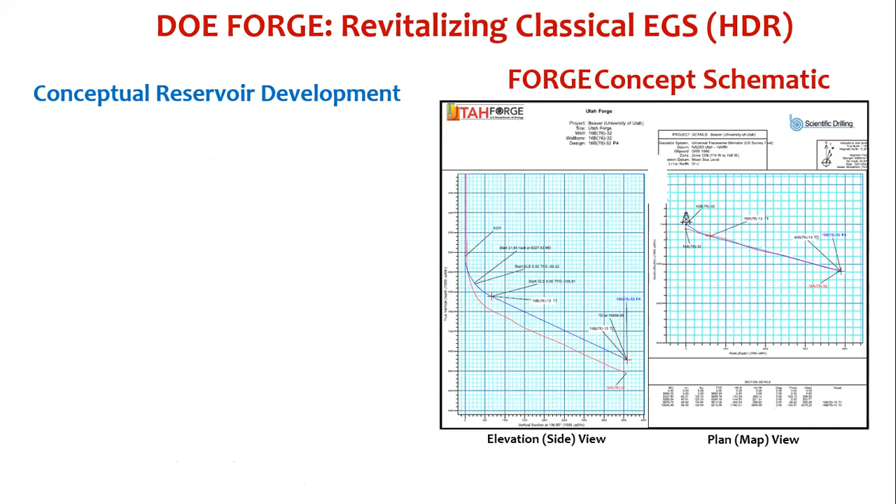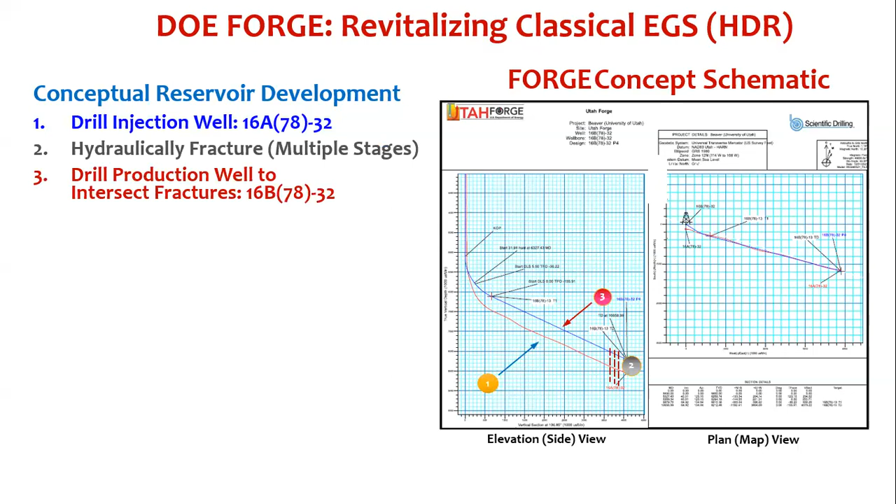As you recall, we drilled 16A 7832. Last April, we did 3 hydraulic fractures in 16A. This year we just completed drilling 16B 7832, intersecting to the best of our ability the microseismic cloud from those 3 stages. In a commercial situation, we would populate the rest of the well. Our future plans will be to create these hydraulic fractures along 16A and also eventually do some work on 16B.

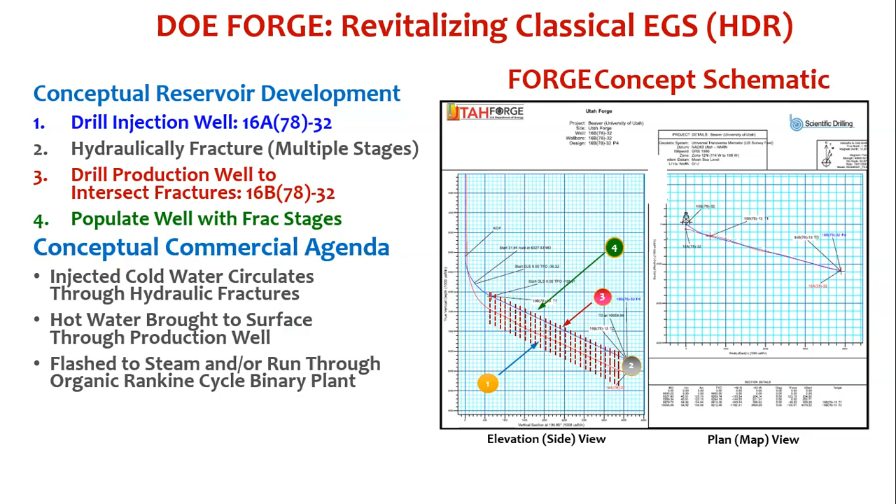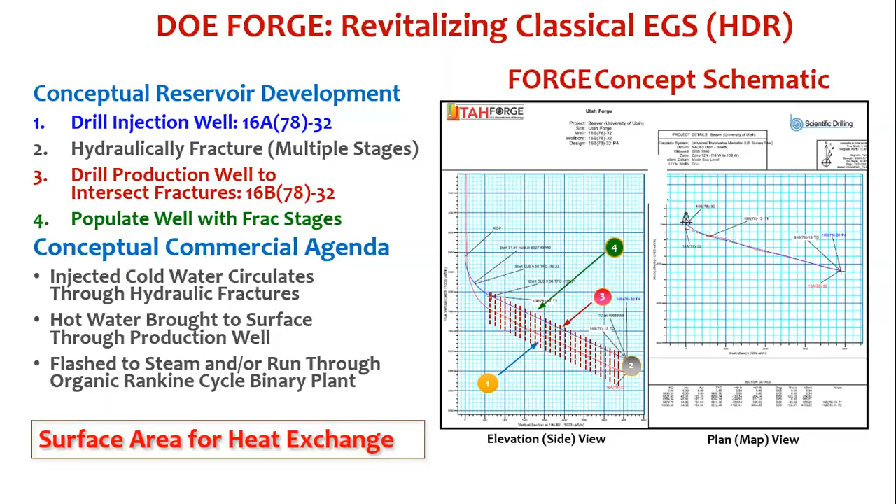As we were drilling 16B, a well drilled 300 feet vertically above well 16A with the same trajectory, temperature was again a challenge.

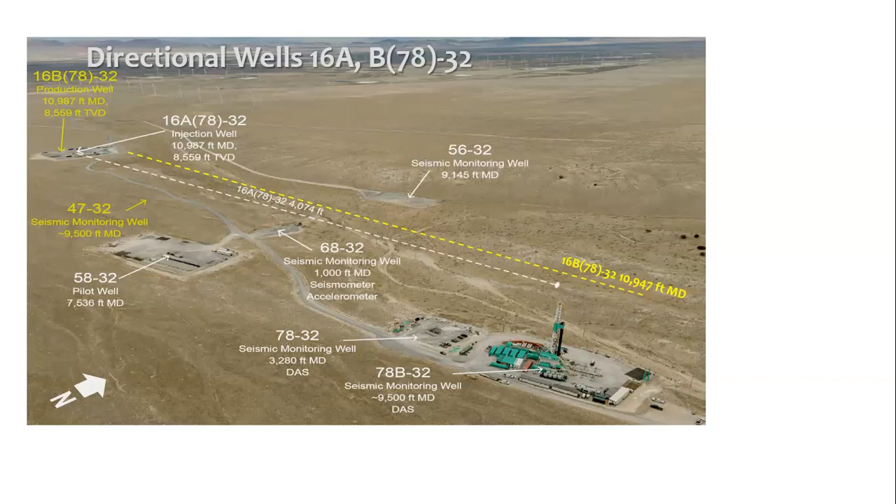This is a bit of a travelogue describing what was encountered in these wells. As you recall, temperature is the dominant challenge, a conductive thermal regime with static bottom hole temperature somewhere in the neighborhood of 450 degrees Fahrenheit at the depths we're talking about.

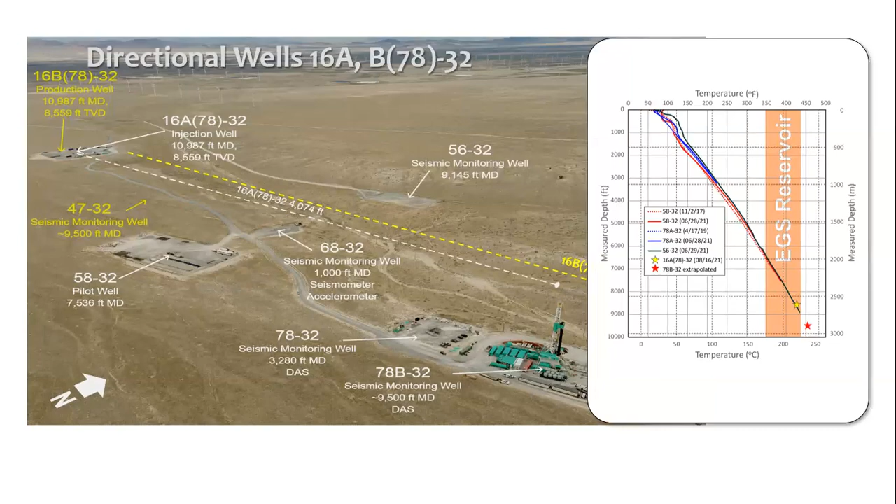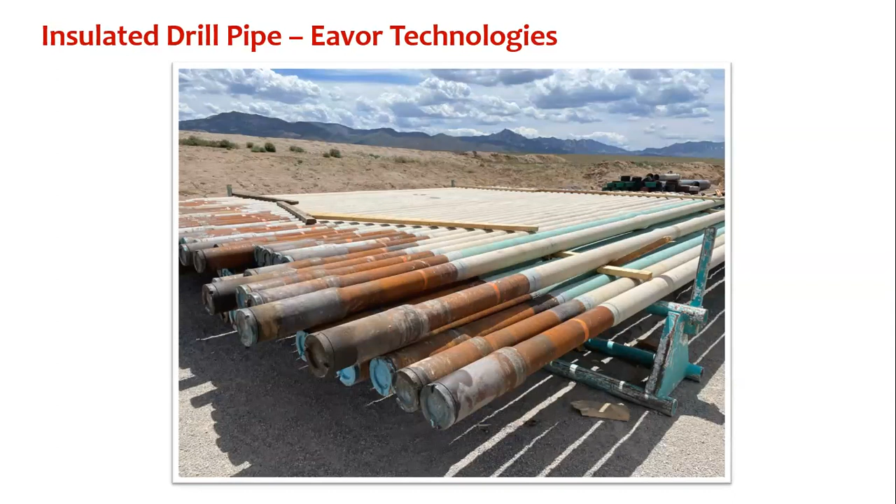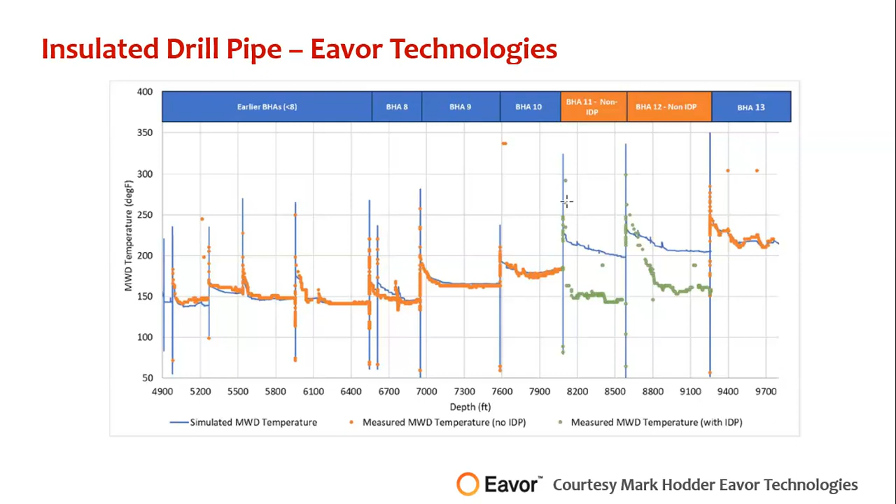It's undecided whether the reduction in temperature assisted the rate of penetration, but unquestionably this will assist in running tools that are temperature sensitive. I think it qualifies as a significant success, something that bears future evaluation. The DOE earns significant credit for facilitating this particular test.

Now, temperature is always an issue. The second challenge in these reservoirs, not so much a challenge, is the lithology - we have to appreciate what sort of lithology and naturally fractured regime we're dealing with.

As we know, we're dealing with a high strength, high modulus, abrasive granitoid to gneiss. Through these operations, we spent a lot of effort coring to recover core for the R&D programs and for characterizing rock mass properties and fracture properties.

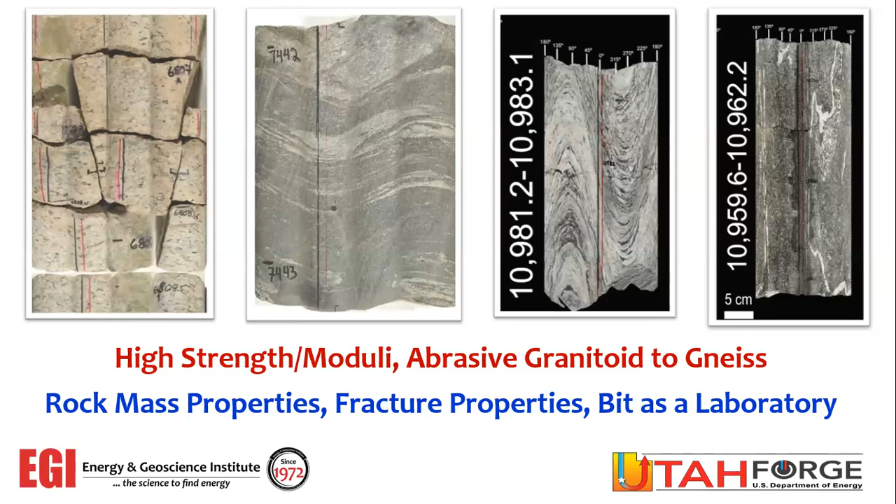At Forge, we have a substantial interest in understanding the bit as a laboratory, taking measured properties at the bit and back-analyzing those properties to come up with mechanical properties along the entire length of the well. So a lot of coring, a lot of effort in terms of reservoir characterization to determine fractures.

Many of you have seen me show this slide before, but I think it's so important.

At the right is what we often see in an unconventional setting, where we see relatively planar fractures. What you're seeing are microseismic networks from multiple stages. If you look at the top part of the right-hand panel, you can see these are relatively planar.

The question still remains, are these planar in a setting such as at the left, which is an outcrop of the Forge Reservoir, where despite exhumation and exfoliation, there's indication that in situ there are multiple fracture patterns.

These fracture patterns we've been able to monitor particularly well. Schlumberger has been a great partner in terms of doing this. And to overcome the temperature, we've done a couple of things.

First of all, what you can see on the left are FMI tracks, static and dynamic FMI tracks, and static and dynamic UBI tracks. These have been particularly illustrative in terms of determining fractures and also in terms of determining the profile of the well.

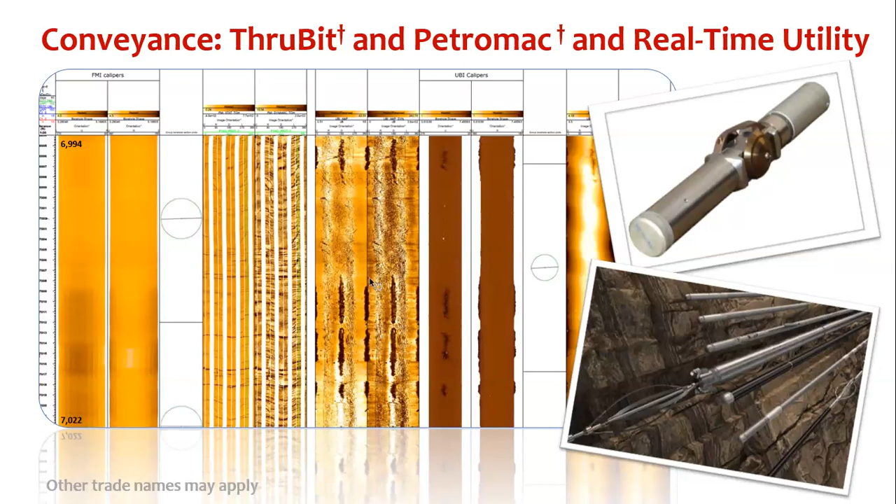And so substantial and excellent logging information has been derived. We've also, as I said, done a significant amount of coring.

The picture at the top is from core 1, I believe—the first core that we took, and I'll show you that in the next slide. There was a lot of exploration in terms of improving coring performance.

And ultimately we worked significantly with Canamera Coring, and they guided us on the optimization of the weight on the bit to optimize and maximize the length of coring possible for each core run.

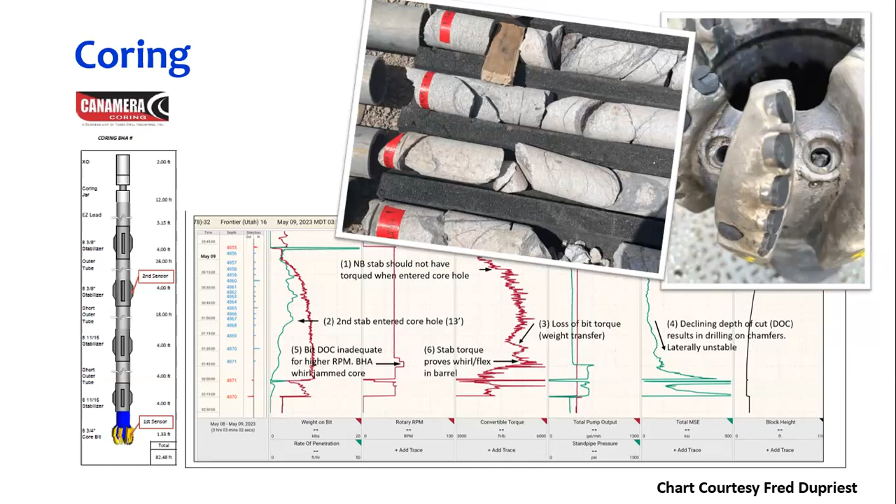In terms of that, we selected 4 zones for coring. As you can see, a shallow vertical zone—picked shallow so we could sample some lithologies we hadn't cored before, and start to debug the coring process, because it's a hard, difficult rock to core.

Subsequently, we picked 3 zones where we felt the microseismic cloud from the 3 fracs in the 16A well would intersect the projected trajectory of the well we are drilling.

We bracketed 60-foot zones and cored within them. Stage 3 somewhere in the 9,800-foot domain, stage 2 somewhere in the 10,250 to 10,300 foot domain, and then stage 1, the first frac in 16A, at 10,430 to about 10,490.

So as you can see, 176 feet of core captured, about 154 feet of that was recovered, and that's out of a total of 9 runs, so 270 feet of barrels that had been run.

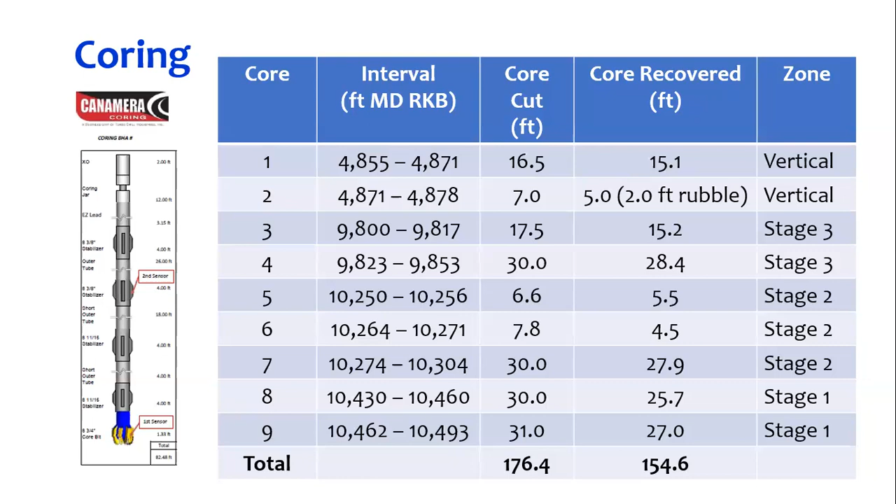Really an extremely successful coring campaign, and I encourage people—right now Clay Jones and colleagues are evaluating these cores. There'll be more to come on mapping of the cores, fractures, mechanical properties testing, and possible determination of whether we detected tracers on these cores. So a lot going on with the core analysis—stay tuned for that.

Of course, we're always interested in drilling technology, and we had a great partnership with the bit companies in particular.

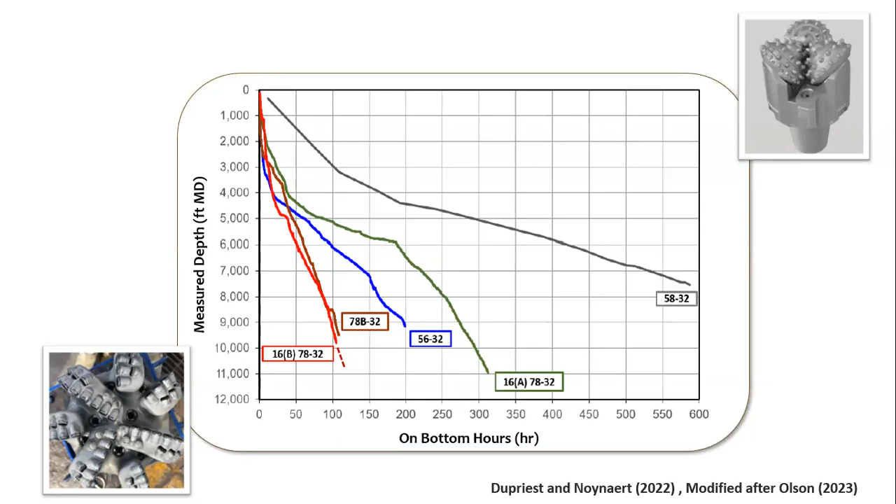drill 500 feet with a particular bit or a particular assembly, and then pull that assembly, even if it was green. And all of the bits, particularly the 8 3/4 inch bits and the 9.5 inch bits, were monitored with sensors, either in the bit or in the center line. And almost all assemblies also had sensors for measuring three-dimensional 3D vibrations in the BHA.

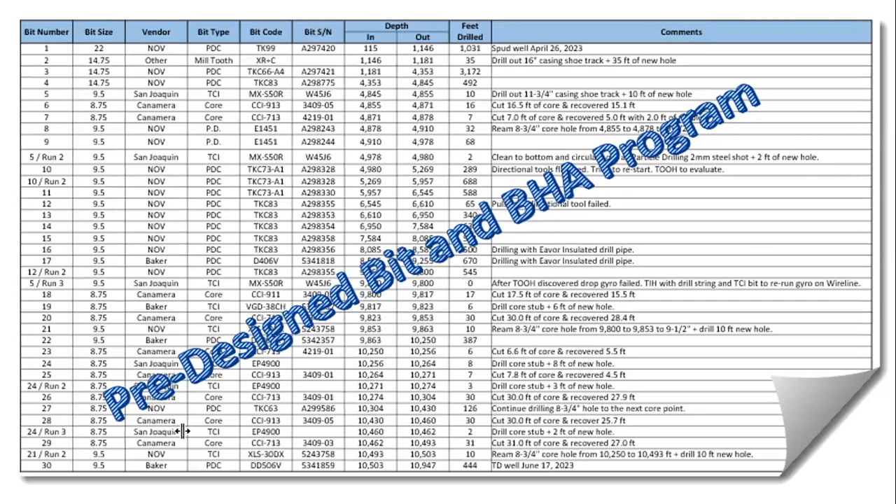So there's a lot of analysis that's going on there. And this is a particularly interesting topic because vibrations were a significant issue at, and always have been a significant issue in these drilling activities. And one of the things that we also tried on this well was rotary steerables.

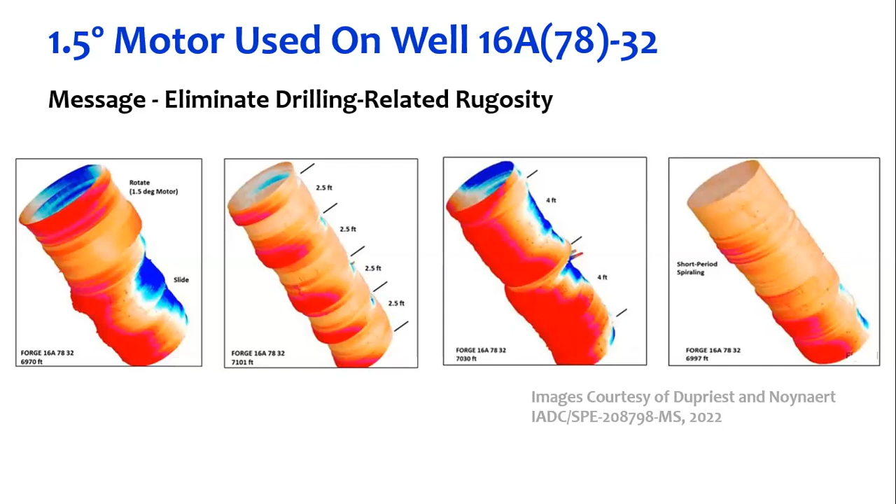And so what you can see is that going from rotating to sliding and vice versa, there are significant ledges. There's significant spiraling in this. And one of the goals here was to eliminate this rugosity, as we'll borrow a term and call it rugosity. And we tried to get around that by using rotary steerable technology.

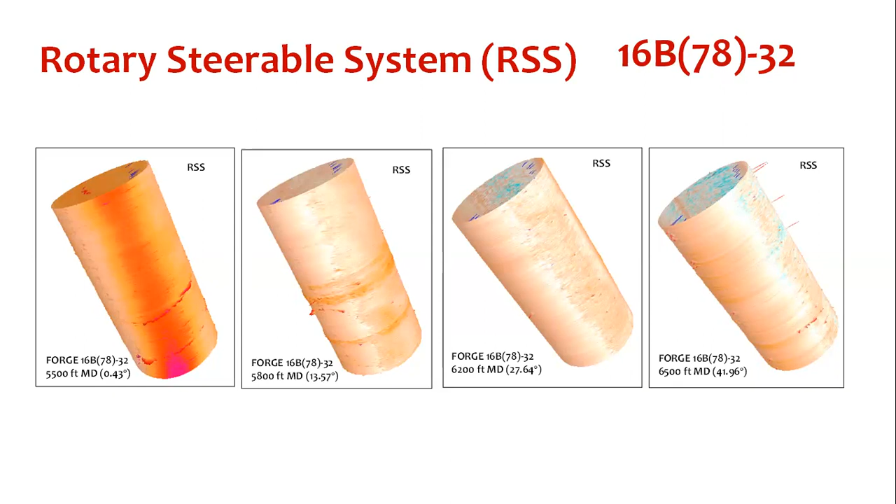Now, the rotary steerable certainly helped, but it did have its own issues, particularly in terms of vibrations and stabilization and temperature tolerance. And so, never a perfect world, and we'll work ahead towards this.

To help with the stabilization, we used roller reamers, and you can see roller reamers at the top here. So what you've got is a full diameter device with roller inserts with nubs on it that help to avoid stick slip, and they worked extremely well.

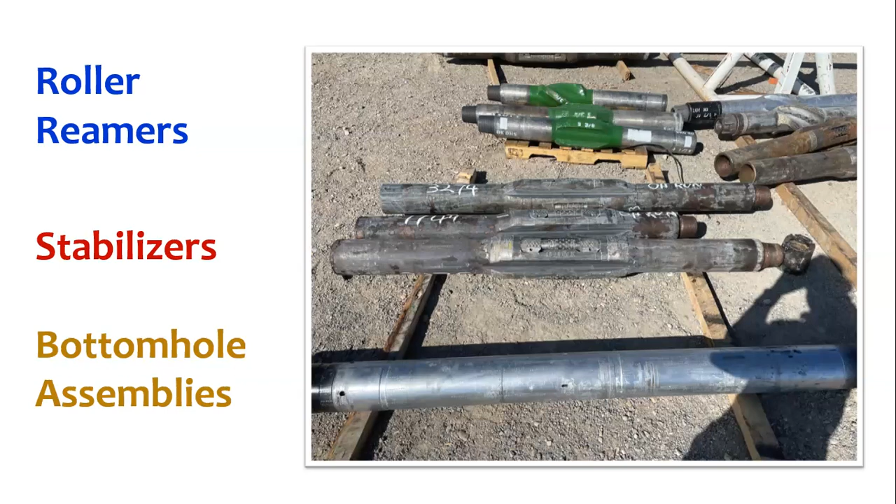We had some other HFTO suppression devices on location, but HF, high frequency torsional oscillations, did not turn out to be a significant problem on this well, but they could be in the future, and we're still interested in evaluating this. And we appreciate the vendors that provided the tools, even though we didn't necessarily use them.

One of the things that turned out that was problematic with the rotary steerable was the degree of vibrations.

We tried to minimize stick slip by running roller reamers, but placement of roller reamers and stabilizers turned out to be a problem, and led to vibrations that were in some cases very significant. It's something we need to address in future drilling.

For example, if we look at this plot, let's look at some vibrations. Here are some measured downhole lateral vibrations, and here are some axial vibrations. You say, well, what's the big deal? Well, the big deal is that this scale is 20 G, that's 20 times the acceleration of gravity. We're having vibrations somewhere in the neighborhood of 10 to 15 G, and that's extremely damaging when you think of force, mass times acceleration, and what that can do to a tool.

So even though we had straight hole, there's work yet to be done in terms of optimizing the bottom hole assembly and the spacing of stabilizers and various devices. But nevertheless, I'm optimistic that this technology worked extremely well. There were complications. You can see a stabilizer at the left that has been worn down significantly, and a roller reamer. This was from a rotary steerable device run with a motor, and the vibrations there were very excessive, and you can see significant damage on this one. Once the motor was taken off, the RPMs were less, and naturally the damage was less. So after this first run, we took the motor off, and there were improvements, as well as some changes made in stabilizer positions. So there's a real possibility for designing these things in advance and improving performance.

The other thing we tried out, and this is the ultimate purpose of these forge wells, is evaluating technologies. We had a very collaborative relationship with Reed Hycalog and Particle Drilling Technologies to test out some of their particle drilling methodologies. One reason this is particularly attractive is from the characteristics of the bit shown on the right. The principle is to inject steel shot in the drilling fluid that cuts out a central hole, the shot goes through the nozzles, it erodes the rock, and then the cutters on the gauge create a very nice smooth hole.

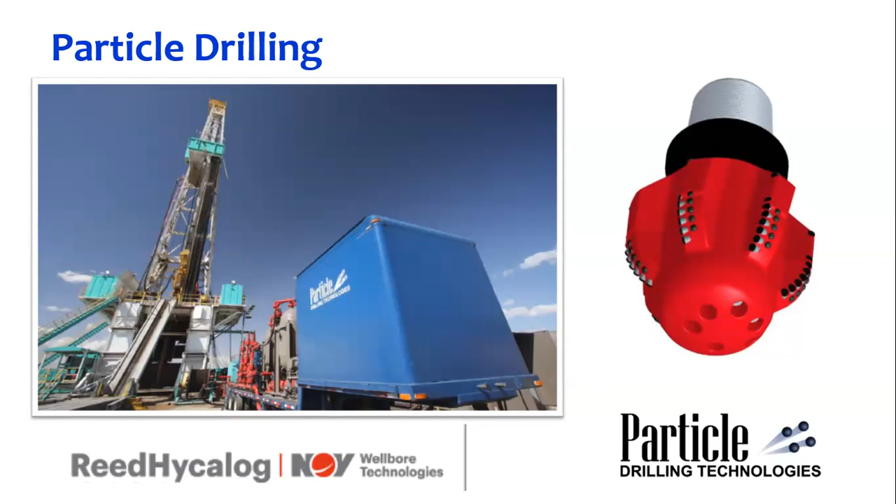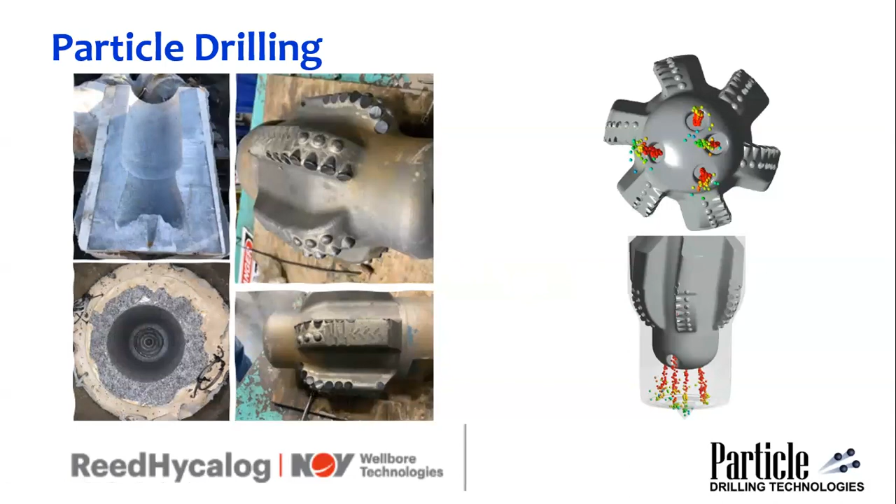Just to illustrate this, you can see an animation of the particle jetting on the right, and on the left, from a laboratory demonstration that was cut open later, you can see the jetting action that occurred and the erosive action. You can also see the very good quality hole that was created. There are some issues in terms of bit design and ruggedness that Particle Drilling and NOV are working on to overcome, and we'll hear more about this in the future.

One of the other successes, drilling was quite successful. We also ran 3 fiber optic strings, and a great deal of thanks goes out to the participants under the DOE R&D programs: one program between University of Texas at Austin and Shell, and another program between Rice University and Silixa. So the 3 fibers were, one was a Baker Hughes

pressure temperature gauge, run just past the heel, and then the UT Shell team ran other fibers right to the toe, to the shoe of the 7-inch casing. You can see at the right the Shell cabling, and I'm calling it Shell cabling in quotes, but Shell was intimately involved.

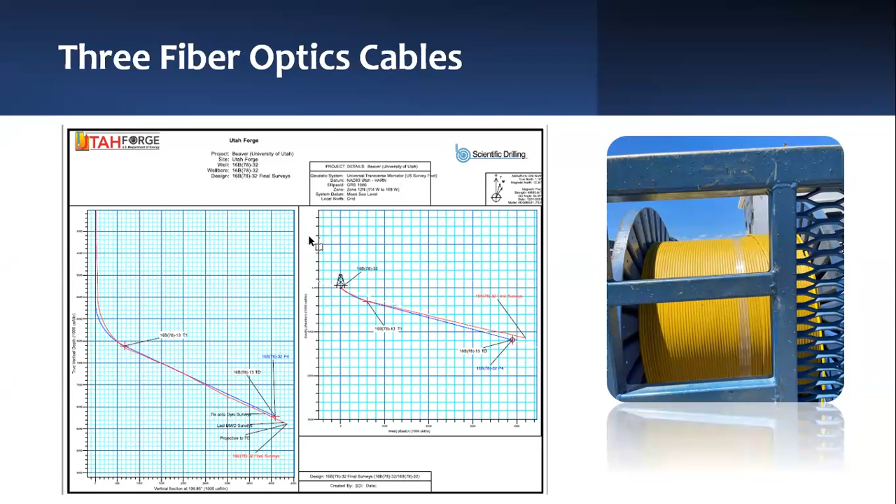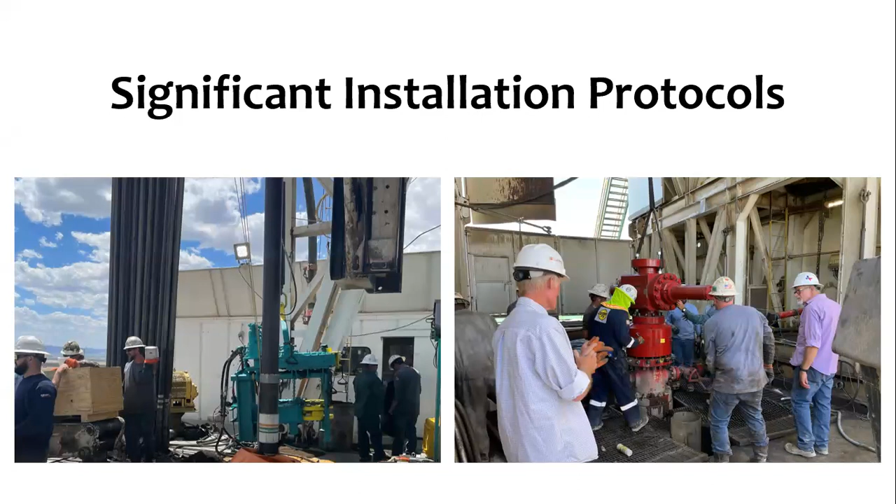A couple of close-ups of what's going on here: you can see some of the strapping of protectors on the left-hand side, and putting a master valve on the wellhead on the right-hand side after the cables had all been successfully run. So we do have some preliminary results here.

I'm going to show some work that's been provided, some analysis provided to us by Neubrex Energy Services, and we're very grateful to them for their efforts, showing some of the work that was run while the cement was being circulated.

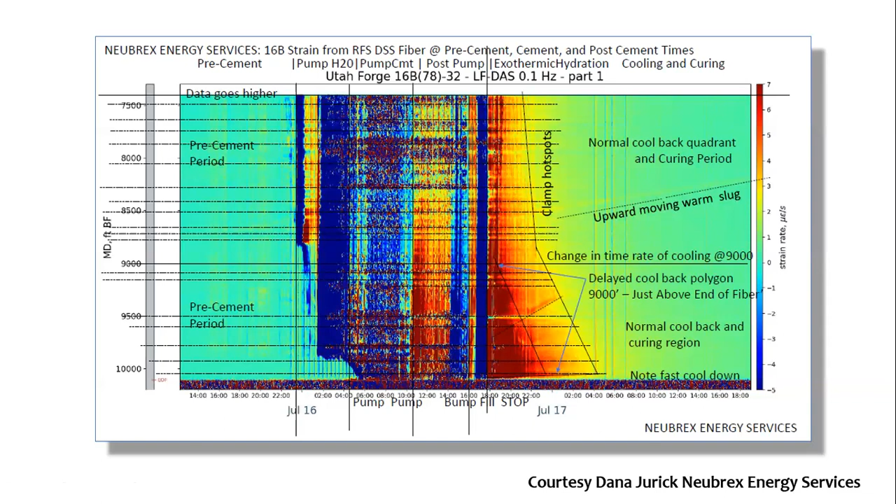It's all very preliminary in terms of analysis and determination, but you're seeing a rate of change of strain - blue becoming more compressive, negative becoming more compressive, and positive becoming more tensile. A lot of this rate change is a function of cool down, exothermic effects at the other end, and ultimately cool back. So a lot going on yet.

Outstanding data has been acquired so far by Neubrex and by Silixa. Now, so we've got these 2 wells in place, and our ultimate goal is to connect the wells.

So I'm going to go back and walk down memory lane for a second here and talk about the fracturing that was done at the toe of 16A, so that we can appreciate the circulation testing that was carried out to determine how much interconnection there was between the wells. So let's recall.

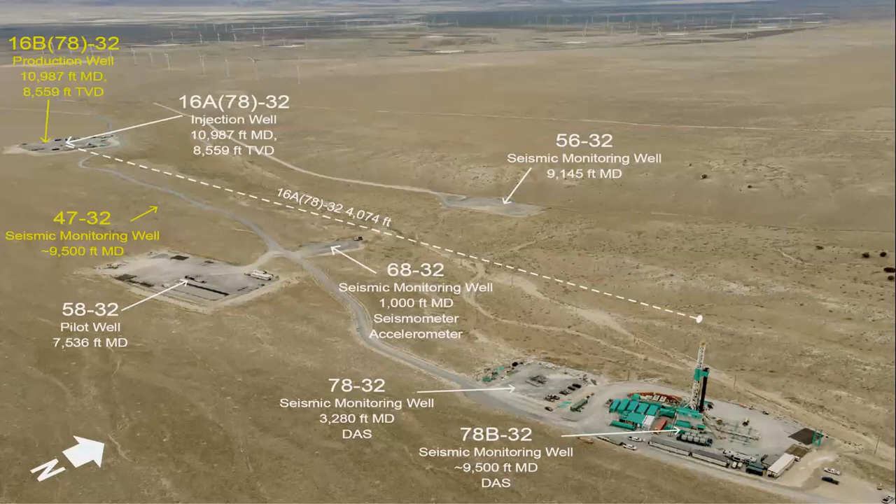Early April 2022, all there was a 16A well, and it had not been fractured. Later in that month, we carried out 3 fracturing stages on that well. During those fracturing stages, we had geophones in 3 wells, and we also had equipment in 78.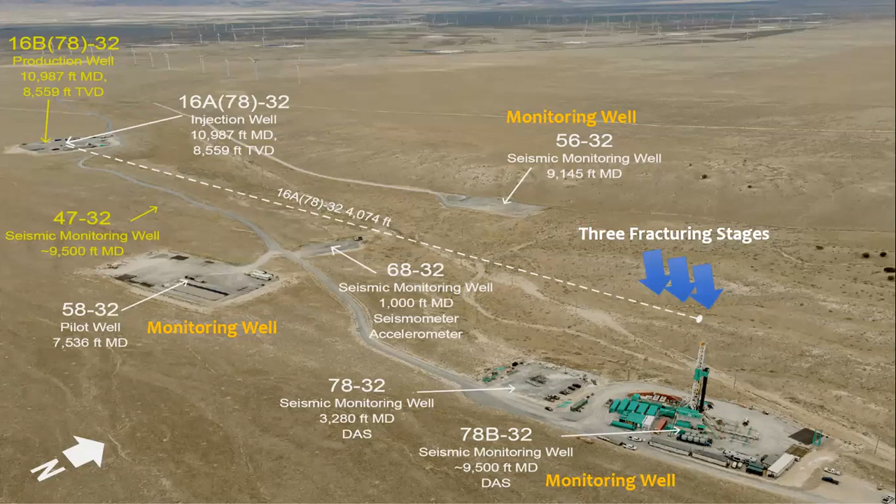We also had some fiber optics in 78, and we carried out 3 fracture stimulations in 16A.

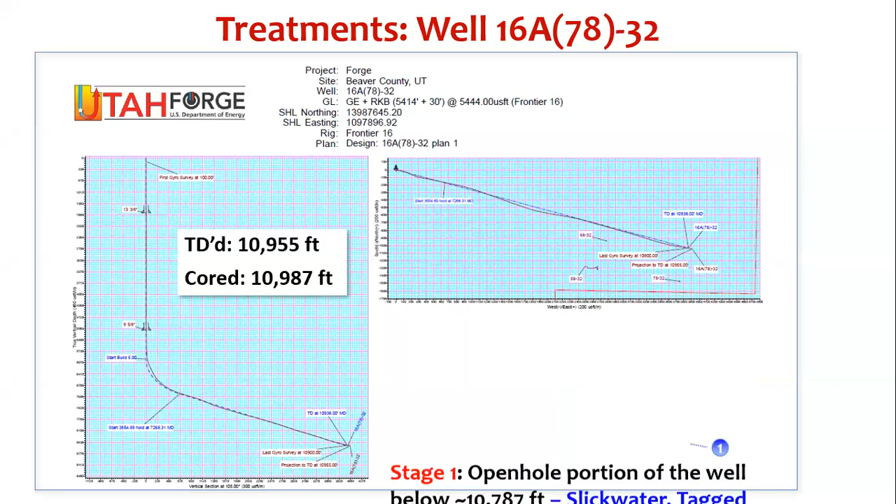So this is the profile of the 16A well. The first was in the 200-foot open hole, slick water, tagged with a naphthalene disulfonate - I'd have to look up specifically which one - but in each of the 3 stages that were pumped, it was a different species of tag.

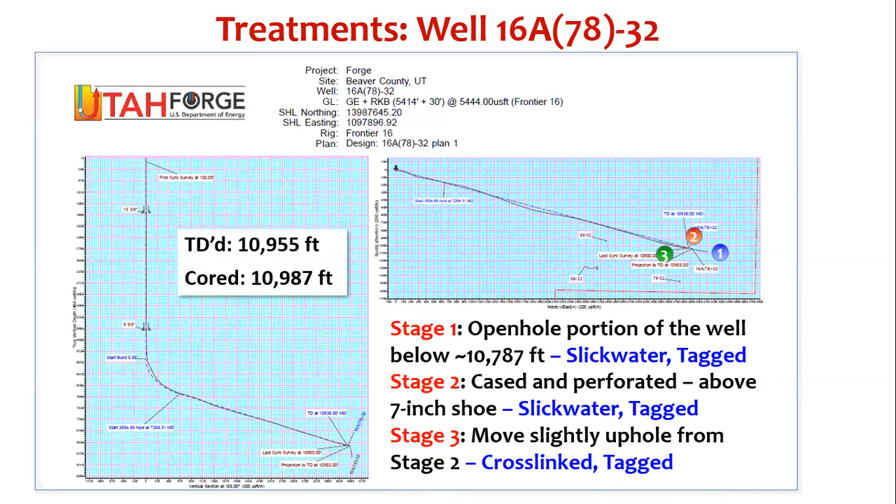The second, we moved up the hole, in a cased and perforated zone, we pumped slick water, tagged fracture. The third stage, we moved up the hole a little further and pumped a cross-linked carboxymethyl hydroxypropyl guar, once again with a tag.

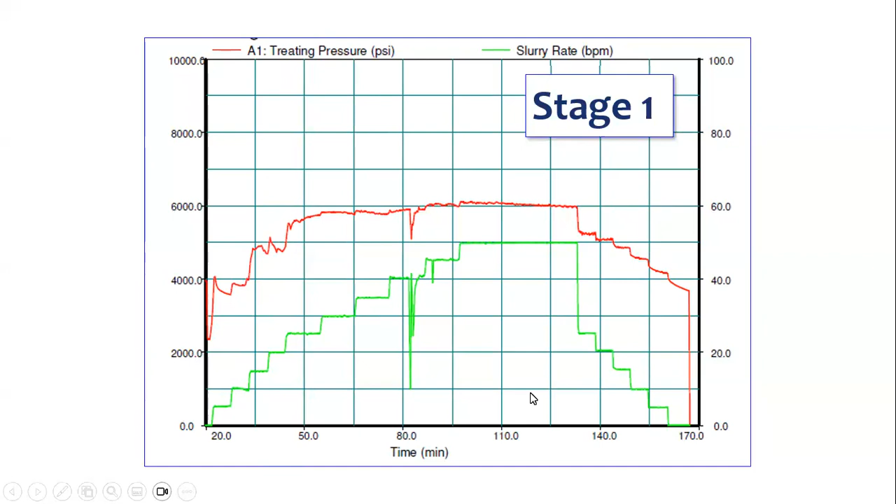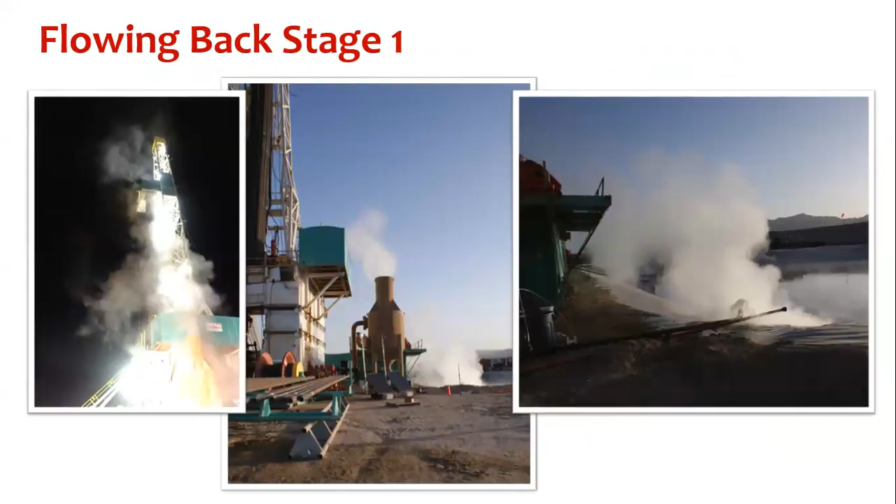We flowed that well back for a substantial period of time. Surface temperature of about 222 degrees Fahrenheit. Subsequently, after 16 hours of flow back, we ran into the hole with a bridge plug.

Historically, we've had significant difficulty in coming up with isolation technologies such as bridge plugs. In fact, a frac plug would be desirable - a frac plug that could be run on wireline, even more desirable. But those were not commercially available or viable at the time.

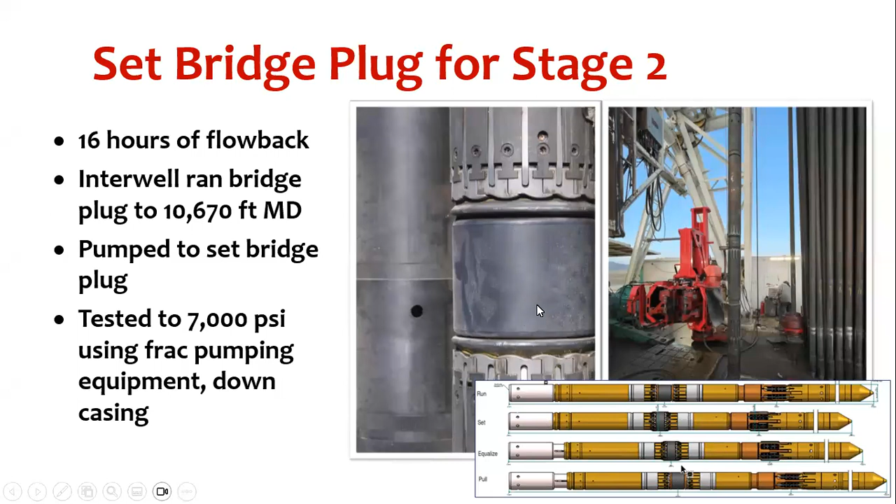You can see the elastomer that provided the seal. So we ran the bridge plug in the hole, set the bridge plug, and tested the bridge plug to a differential pressure of 7,000 PSI.

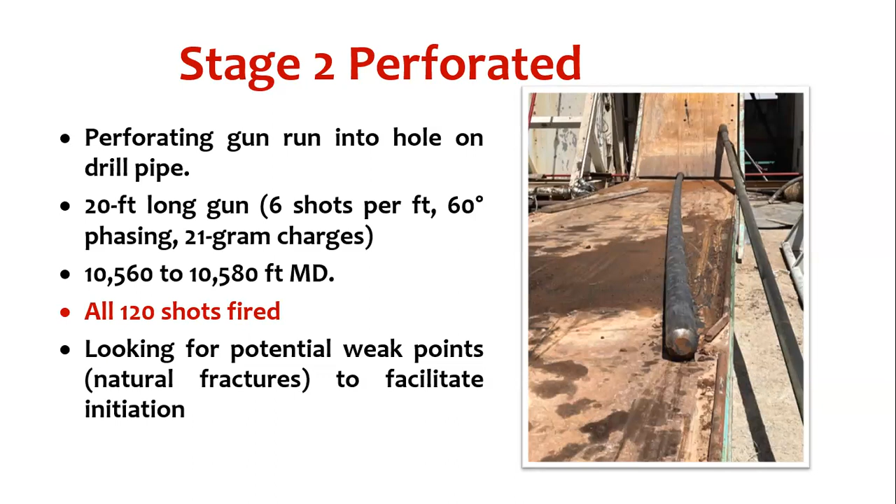Then we ran in the hole with a perforating gun - 20-foot gun, single cluster, a long gun - so that we'd be sure that we would intersect some sort of pre-existing weakness. 6 shots per foot, 60-degree phasing, 21-gram charges. Everything fired, so we have a perforated zone with a bridge plug below it.

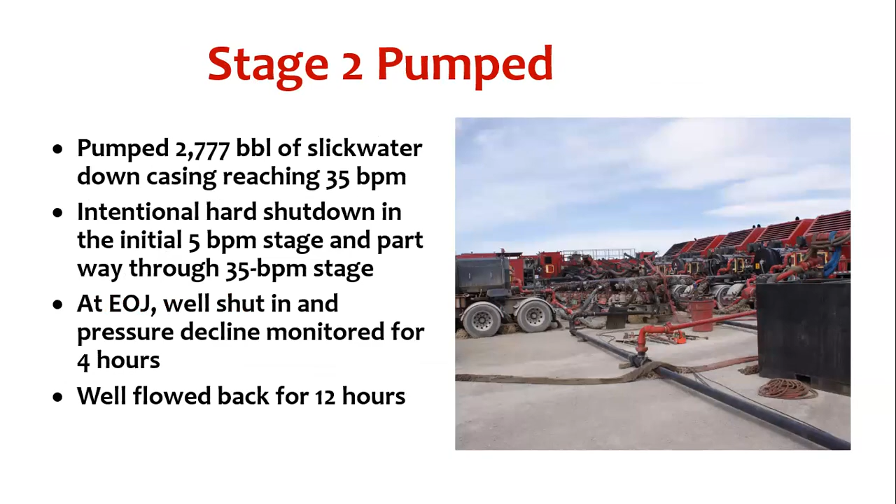We pumped about 2,800 barrels of slick water and flowed back for 12 hours.

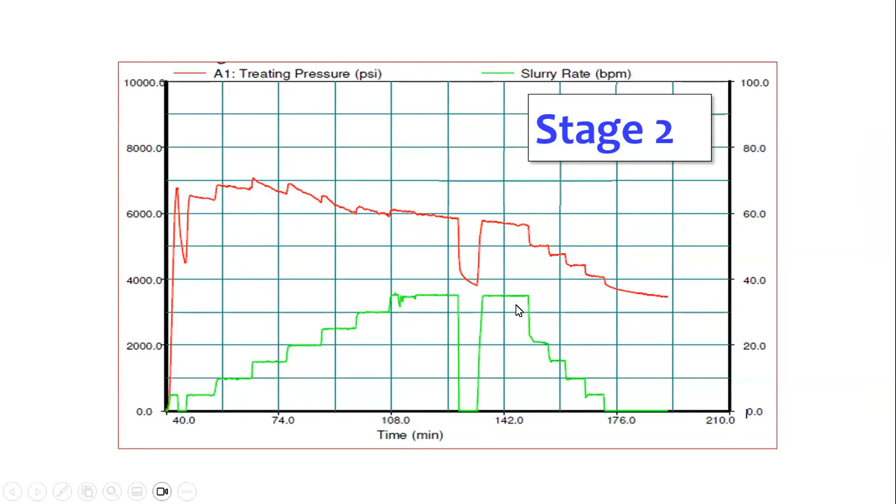So you can see that in the cased and perforated scenario, there's a slightly different pressure profile - a declining pressure profile as growth occurred, as opposed to the flat pressure profile in the open hole where presumably multiple fractures were taking fluid. After that's done, we flowed it back, set another bridge plug, and went on to pump stage 3.

And stage 3 was the viscosified fluid with a little bit of microproppant - very small concentration, small amount.

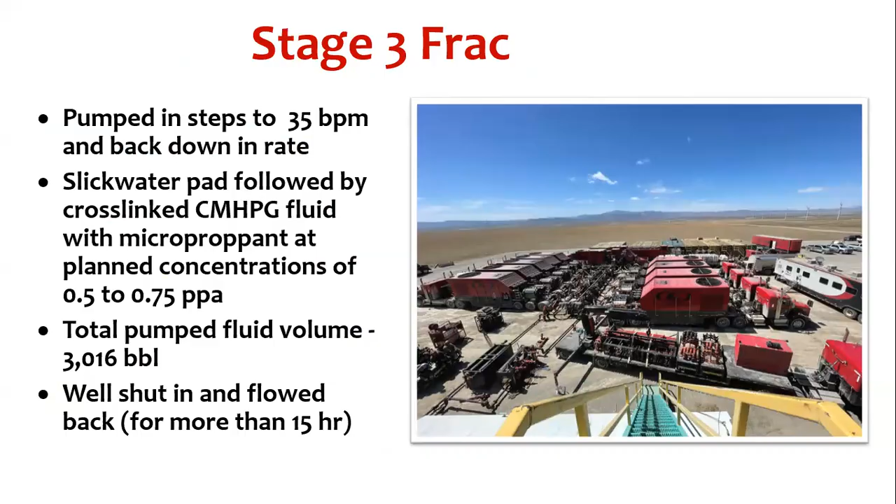Microproppant is sub-300 mesh proppant, and we pumped 3,000 barrels of that and flowed the well back.

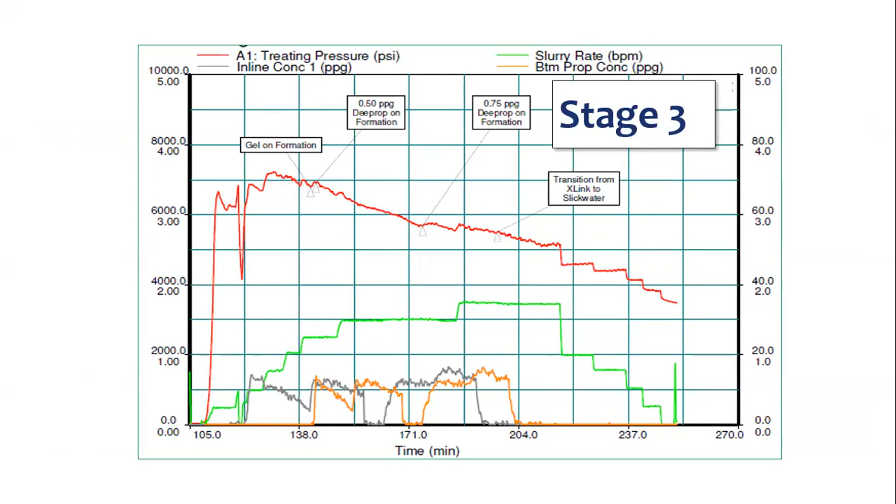Profiles somewhat similar. So all of this is just setting the stage for the circulation testing we did after we had drilled 16B. The purpose of the circulation testing was to establish the degree of connection between the two wells.

One of the things that was particularly interesting that Clay Jones, Stuart Simmons and others found was that the flowback water after the fracs in the 16A well in April 2022 contained high quantities of chlorides. There were indications in the figure at the right that there was no interaction between the fracture stages - tracers pumped in one stage were not detected in the next stage if they were isolated. The bottom line message is that the fractures were discrete; there was no interaction between them.

However, the surprising thing from the flowback were the salinities and the TDS, and these chlorides turn out to be a very nice geochemical signature for new fracturing being created in the reservoir.

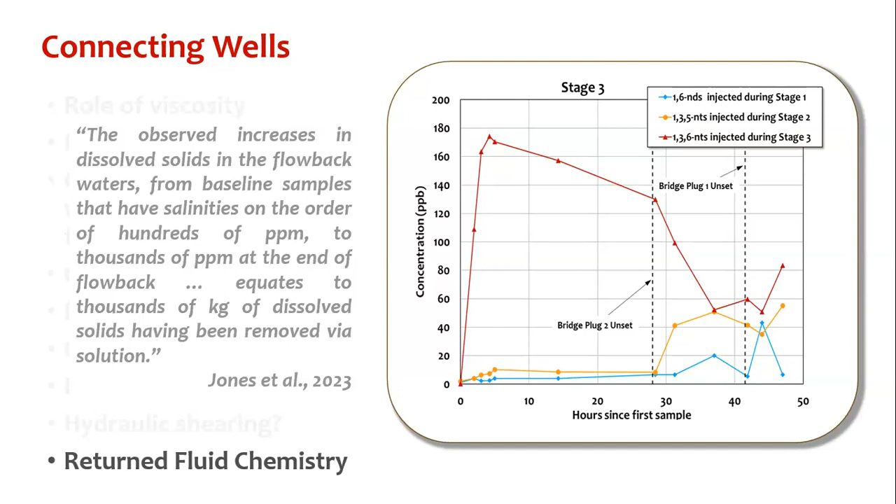The other important thing is that we had up to 3 geophones functional in multiple wells, and we were monitoring the microseismicity that went on. Starting from the upper left, we can see stage 1, open hole, relatively weak signals - and this may be an outdated version. There may be more events detected since, and some of the locations are difficult because there was only 1 geophone functional.

The blue is the injection well, the gray is the injection zone, and what you can see is not a great deal of activity in the injection zone - though lately we've got more events showing up, but very small. This could be a function of Kaiser effect because we had pumped into this zone previously, or the fact that there were multiple entry points where the velocity was relatively low and the magnitude events were not significant. But later in the injection program, we saw events that grew back at an angle towards the well. My interpretation is that the velocities became low enough that fluid started to go into pre-existing natural fractures that were not necessarily vertical, hence the inclination.

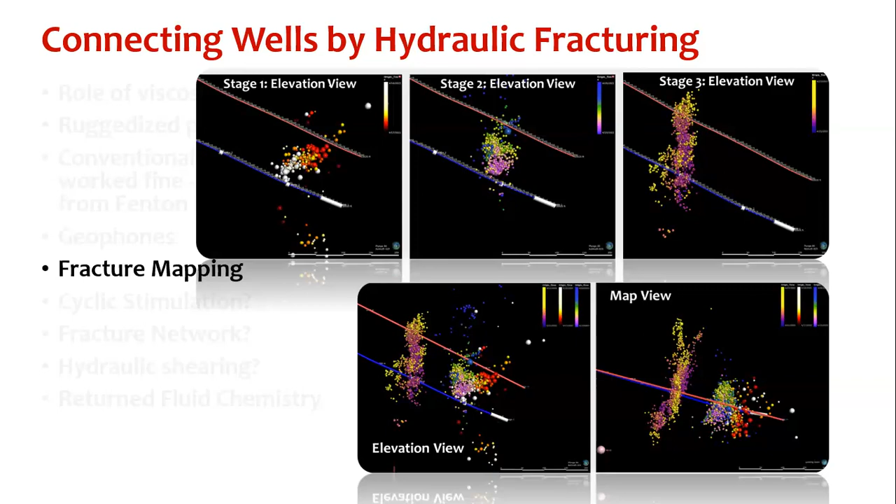The bottom line is that from this, we saw no indication that we should not drill 300 feet above the wells, which would look like it would intersect the microseismic clouds being created. So we went ahead and drilled the well as I described earlier, and then carried out circulation testing.

There were 2 campaigns carried out. One was in an open hole setting before we ran the 7-inch casing, run on July 4th and July 5th of this year. We ran that at rates between half a barrel and 7.5 barrels per minute in stages, and I'll show you that in a minute.

The open hole section went from the bottom of the 11 3/4 inch casing shoe to the drilled TD of the well - from 4,837 feet, in part of the vertical hole, to the toe of the well at 10,947 feet at a 65-degree inclination.

So if we start from the illustrations in the upper left, you can see that we had Schlumberger bring in 2 coil tubing pumping units, and we can only see one of them in these pictures. The purpose for these coil tube pumping units is that we could control the injection rate and provide the pressure at low enough injection rates where we would not be creating new fractures. So we had 2 of those units.

Starting from the upper right and moving counterclockwise, there's one of the pumping units. You can barely see the iron and the wellhead it was hooked up to, and on the right you can see frac tanks. At the upper left, you can see some of the instrumentation designed by Kevin England and Rob Podgorny, monitoring off of the 16B wellhead.

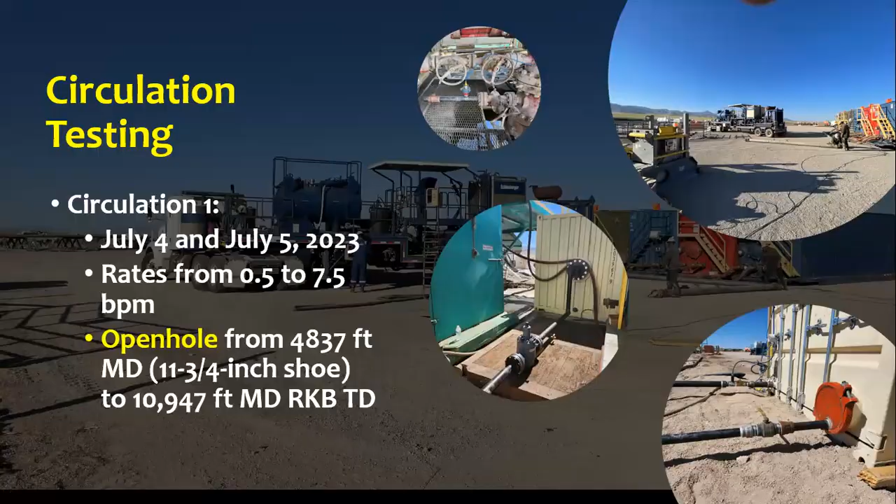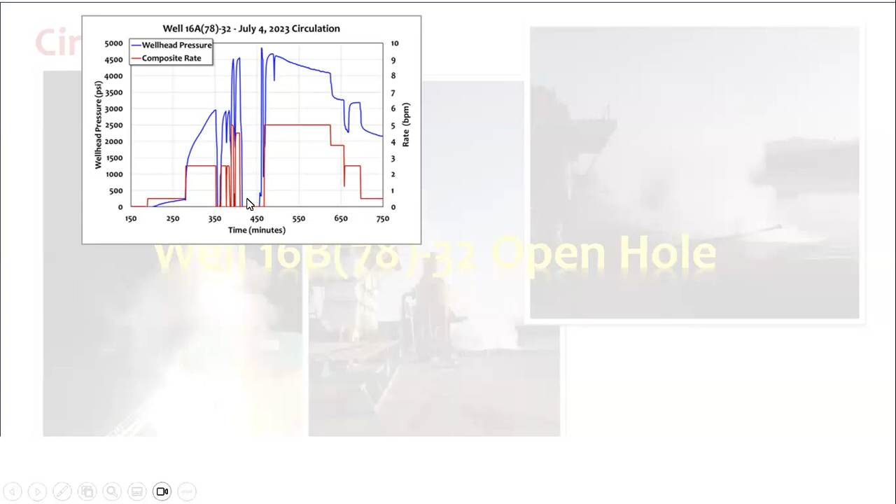You can see that starting out at 1/2 barrel per minute, there was very little activity. Pressure just sort of leveled out. So following the protocol, we increased to 2.5 barrels per minute.

Once we got to 2.5 barrels per minute circulating, we were bullheading fluid down the 16A well. That's going into 3 previously fracked zones, an open hole 200-foot zone that had been fracked, and 2 cased and perforated zones that had also been fracked. The fluid was just bullheaded down, no isolation.

Increased to 2.5 barrels per minute. Once we got there, things sort of caught and pressure built, and eventually you started to see some sort of opening somewhere around in here. So the 2.5 barrel per minute stage went fine.

Some difficulties with the pumping equipment. As a matter of fact, we shut in to bring on a second pump, and eventually pumped 5 barrels a minute. And at least for the first part, there's a characteristic pressure drop that occurred during the circulation testing.

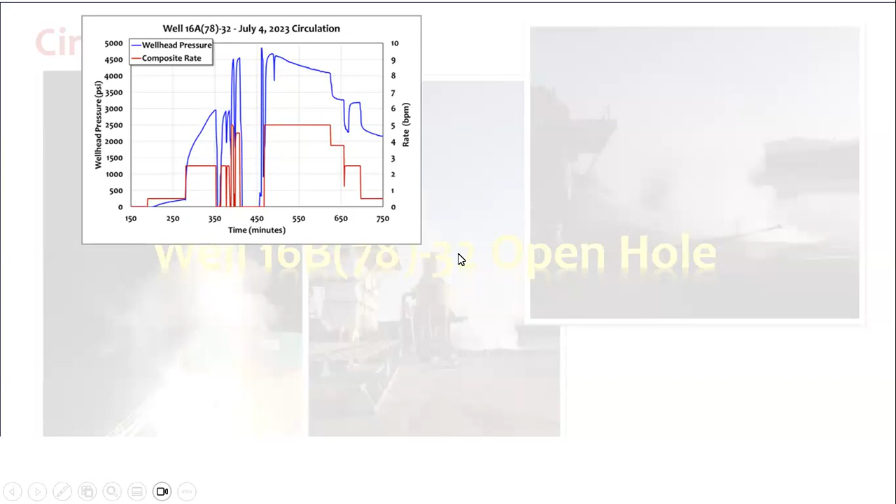So what happened? That's at the 16A well. What happened at the 16B well? Well, this is going on, and I've approximately, pretty closely I think, lined up the times here, so you can see that really nothing, no significant level of communication at 1/2 barrel a minute.

At 2.5 barrels per minute, we started to see pressure catching in the 16B well. So the throttling valve was closed, and we kept it that way, which prevented fluid from going to the separator. That meant we had a closed system that we were pumping into.

So the pressure built, and at 2.5 barrels per minute it built relatively rapidly, and continued to build at the 5 barrels a minute rate. Once we got to 200 PSI, as per our program, we manually adjusted the throttling valve to keep the back pressure at 200 PSI.

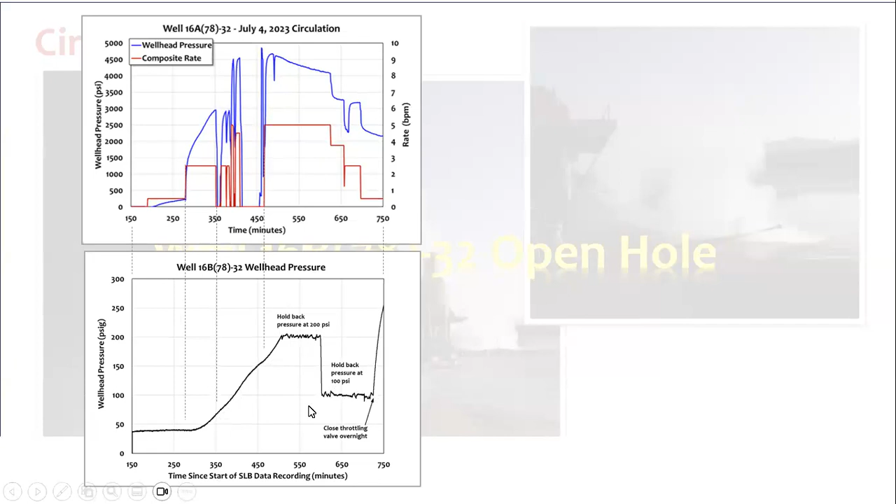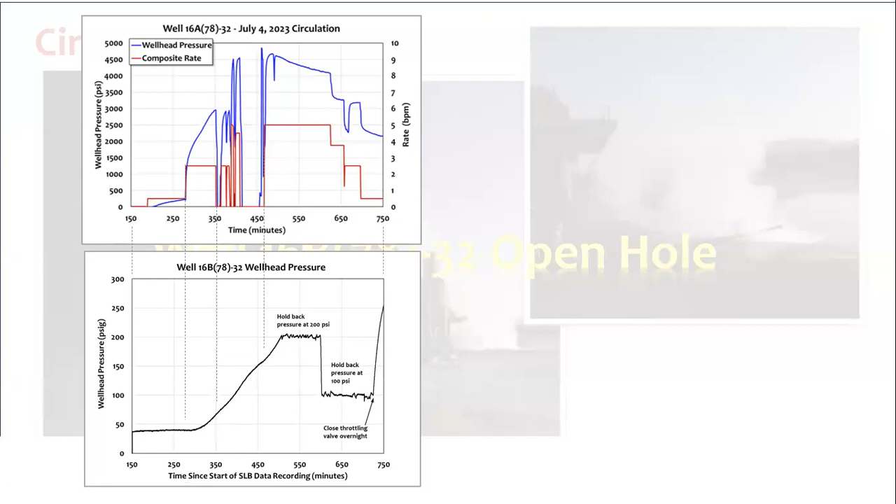And see what sort of flow we would get. Insignificant or small flow, so we dropped it to 100 psi before we shut in for the night. However, we were seeing a pressure signature, and when we shut in, the pressure built rapidly, and stabilized overnight, I think at about 500 psi.

So the next day, July 5th, after the fireworks, we resumed pumping, but this time pumping at 5 barrels per minute for the entire day. A couple of interesting things here: first, the pressure didn't build to 4,500. It just started off about where we left off at 5 barrels per minute the previous day, and the pressure dropped a little bit further.

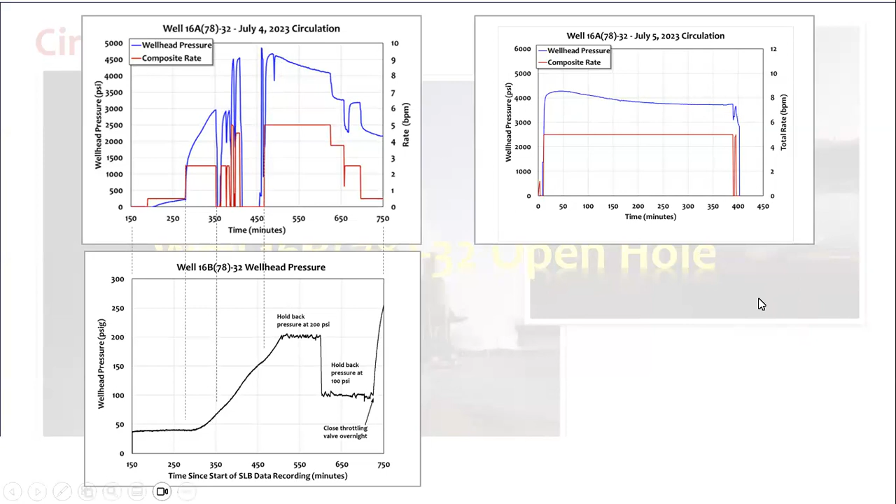This is one of the things one can speculate about—why this was happening, whether it was thermal effects, something in the cool down, hydrostatic head in the pipe that you filled up previously creating fracture networks, et cetera. Nevertheless, it did remain constant.

We had flow meters in line to measure flow, but their threshold lower limit was a barrel per minute, and we were not getting that, so we did 5-gallon bucket tests. As the day went on, as you can see in the lower right, the rate progressively increased steadily to about 15 barrels per hour.

So there's a definite establishment of connection in terms of flow and pressure response. We've also measured increases in chlorides as we circulated fluid, bottoms up, after these tests. And the chlorides, as you recall from the previous flowback work, we're taking those as a signature of fracturing, new fracture surface having occurred.

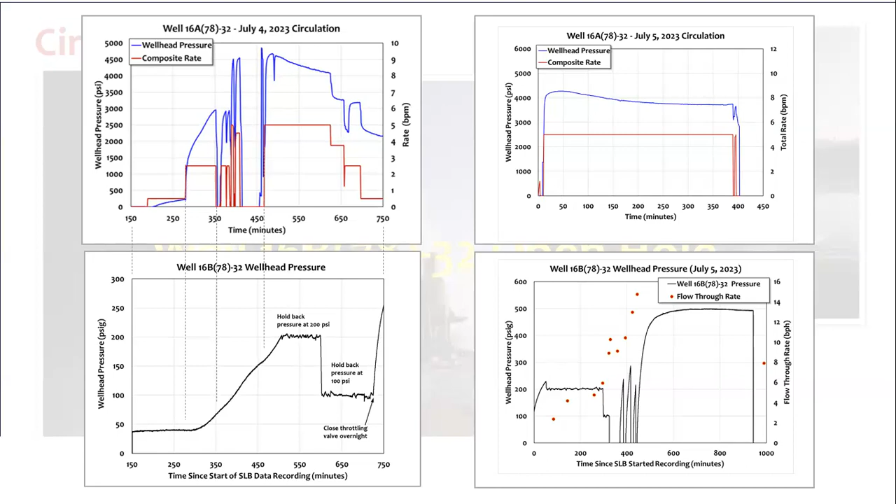We were also monitoring for tracers, and we have found tracers, but we're just not ready to release that data yet. We need to QC it a little bit further.

So that was in the open hole. Then we cased the hole, ran the fiber optics, and repeated testing on July 18th through 20th. What you can see at the right here, we modified the setup a bit—we had less equipment on location because the casing was gone, so there was more room to work.

You can see there's a lot of instrumentation along here—flow meters, pressure devices. This is the throttling valve that would regulate flow to the separator, and this is downstream of the separator where we'd have measurement devices.

Once again, we followed a program of rates from 2.5 to 7.5 barrels per minute, but this time in a cased hole. The cased hole was covering at least stage 3 frac previously, and possibly part of stage 2—it's hard to say.

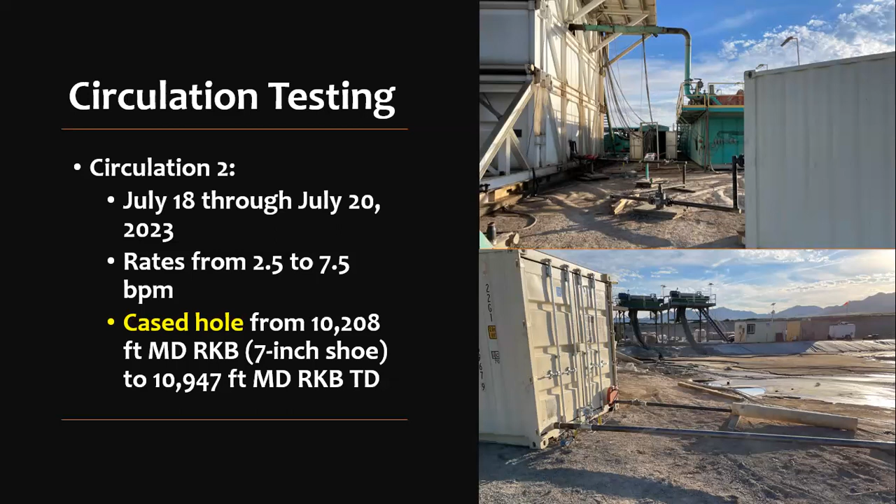The casing went to 10,208 feet, so that left about 739 feet of hole open. So we could at least look at stage 2 and stage 1.

We ran a spinner survey, a pressure-temperature spinner survey, in the 16A well while we were injecting. We'd be moving this spinner device up and down the hole, not into the open hole section, but below stage 2 and above stage 3—between stage 2 and stage 3. So we were able to partition the amount of flow going into each of the zones as we carried this out, and there's some interesting data there that bears a lot of further evaluation from a modeling perspective.

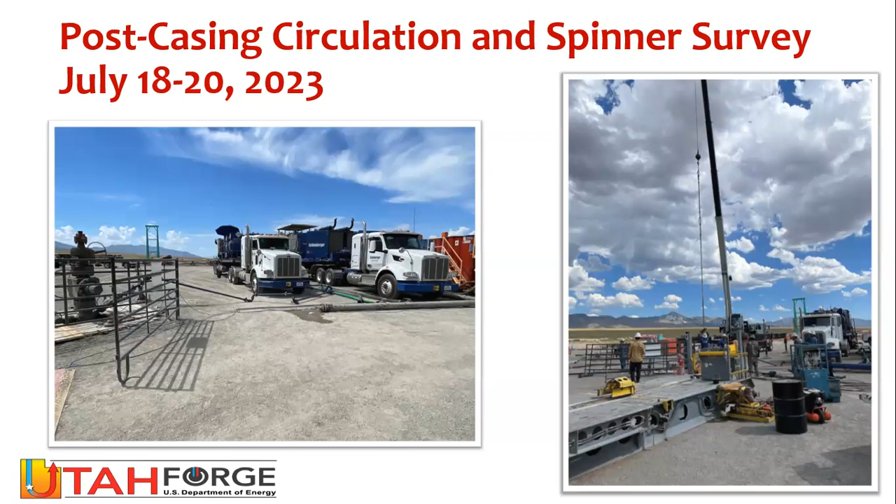This pressure would build substantially. That's the other thing to mention - between these two circulation tests, one ending July 5th and one starting July 18th, both wells were shut in, or the 16A well was shut in at least, and the 16A well held pressure. At the end of this 10-day period, there was still 1,000 psi on the 16A well. So it suggests that this is a container, and that there is weak communication between the two wells, but it still needs to be developed further.

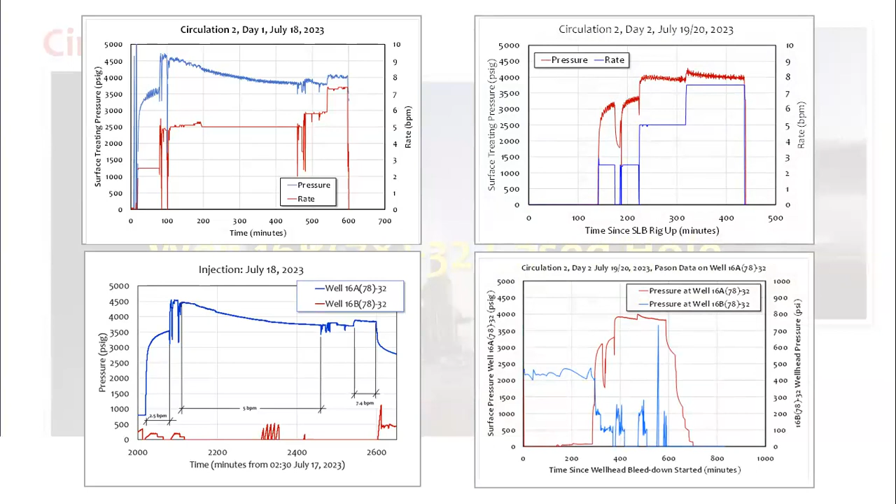So that's the first day after the casing had been circulation, after casing had been cemented in place. The second day we ran the spinner survey, and so we moved the spinner, started above stage 3, moved it to between stage 2 and stage 3, moved it below stage 2, and anything going below stage 2 is going into the open hole.

So we were able to discriminate between all 3 zones, and we did that at 2.5 barrels a minute, 5 barrels a minute, 7.5 barrels per minute, moving up and down, and allowing the flow to stabilize at each point. A grease seal had to be replaced here, and that's why there was that shut-in.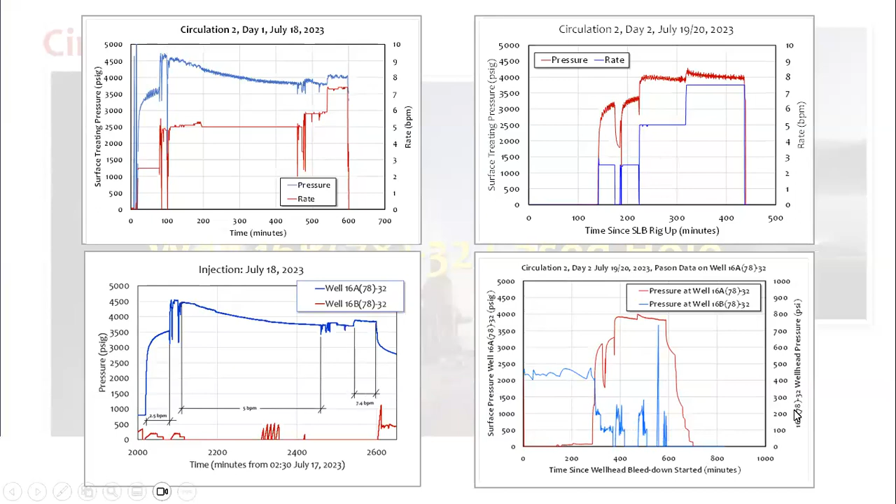And so now you can see that there's more and more ready communication and rapid interaction between the two wells. The blue being what happened at 16B, that it would build almost instantaneously. We would hold it at 200 psi, hold it at 100 psi. But there was a much more significant communication occurring.

In terms of the flow from the circulation, once again, you can see that the blue curve indicates surface pressure at 16A. The red is the injection rate, and the dots are flow rate measurements. And you can see a progressive increase up to about what we saw before, about 16 barrels per hour.

Now, and then we're getting close to wrapping up here. And I've gone long, I'm sorry.

This is showing the flow rate data for each injection rate. The blue is 2.5 barrels per minute, brown is 5 barrels per minute, and the gray is 7.5 barrels per minute. And so you can see that stage 1, which is the open hole section, took a fair bit of fluid, and that's expected because it's 200 feet long compared to the other zones, which are shorter.

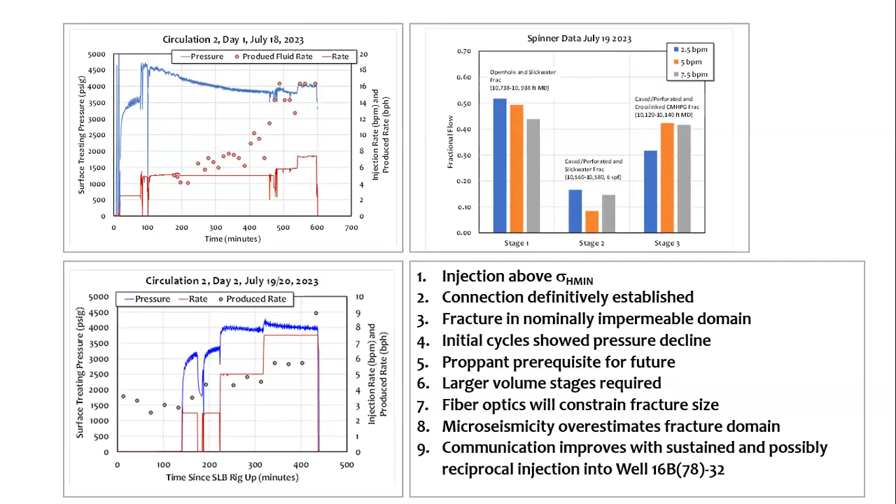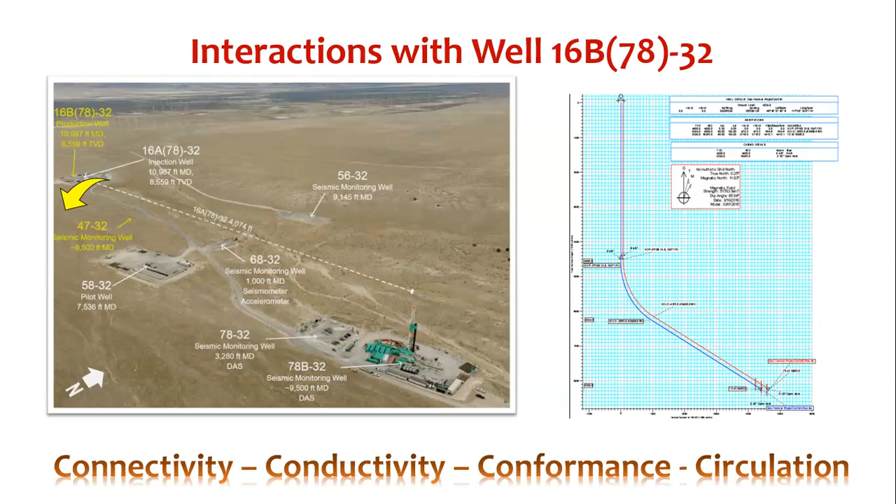correlate between the microseismic network and effective communication. And then ultimately, we're probably going to have to do something at 16B to facilitate overcoming the near well restrictions. So all in all, just a fantastic test, very, very successful. Connectivity established and just on schedule. I mean, this is what we've been talking about. The next stage is conductivity, and then subsequently looking at conformance and long-term circulation.

So I've run long, I apologize, but I really want to thank everybody that was out there on this well for making it a real success.

John, you have some questions in the chat. Would you like to address them?

You're not pumping proppant. You're not pumping large jobs. And I think people have been advocating that we need to pump more fluid and more proppant. The production well was cased primarily so that we could run fiber behind it and understand the fracture geometry.

It's also run, and there tends to be disagreements here. It's also run so that you can see where the fractures are hitting, and you can subsequently perforate and hopefully not damage the cable and establish a connection.

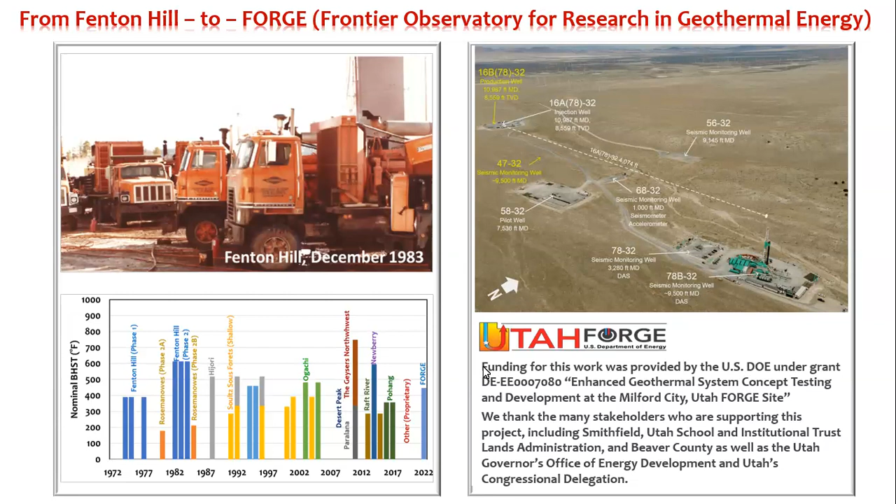Is the ideal in the future, and that may in the future require sliding sleeves rather than a cased and perforated completion. How much? Yeah.

So as Luke pointed out, there was a relatively small interconnection between the two wells, and we did not pump enough fluid to bring fluid to the surface, but we circulated fluid out, and we found tracers and an elevated chloride content in the fluid that we've circulated out. So, this is why we're suggesting that there's a high hydraulic conductivity up to a relatively short distance from the

injection well, and then there is some sort of, I hate to use the word skin, but that's almost what it looks like. It's not. It's a mechanical skin rather than a damaged skin.

Yes, and Ahmed, yes, we did inject above the minimum principal stress. The minimum principal stress is somewhere in the neighborhood of 0.74 psi per foot. Our experience here is that, and certainly my bias, I have to admit, is that you have to create these fractures and to communicate these fractures, you have to inject above the minimum principal stress.

In a production scenario, I also advocate that you have to have conductive pathways that are preserved by having proppant, so that you do not have to have a back pressure that exceeds the minimum principal stress. That you just need to overcome the hydrostatic head and possibly rely on a little bit of thermosiphoning so that your parasitic losses are reduced.